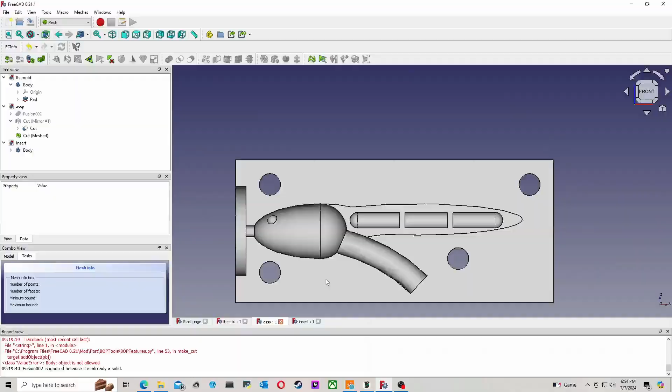To fix that issue we just had, I decided to hop back into my CAD program and fix this thin area where the tail had ripped, making it a little more sturdy so that upon future demolding I could lessen the risk of tearing it apart.

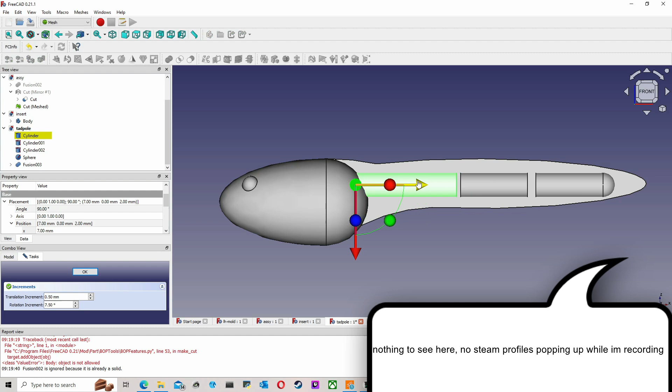The software I'm using is called FreeCAD, and you can see I'm manipulating this primitive cylinder feature to get it so that it comes up into the body of the tadpole, whereas previously it didn't go all the way, causing a thin section that would rip when I took it out. So this is a super simple, easy edit. Should not take any time at all, and then we'll be off printing a new mold.

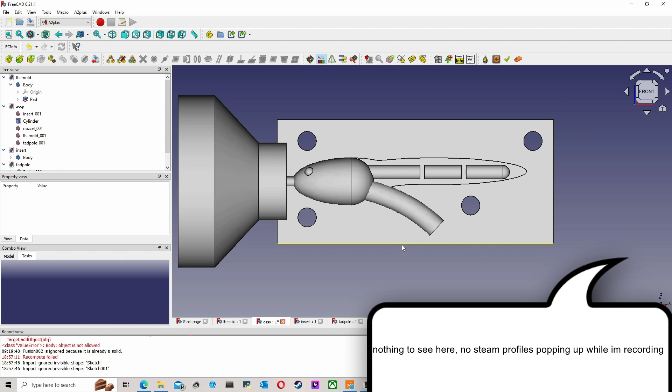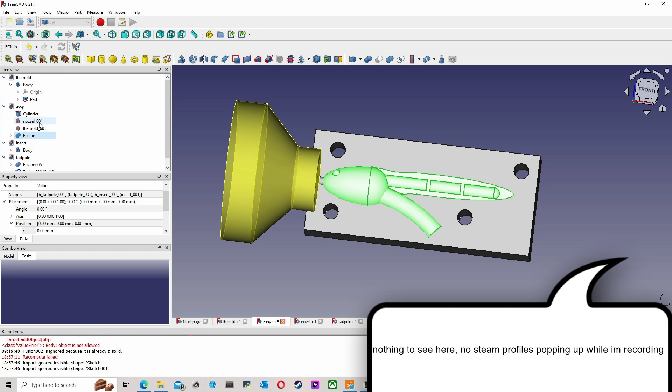Now that we got the updated CAD model, all we have to do is take that updated CAD file and load it into the assembly file so we can do our Boolean cut and actually make the mold we're going to print, making this updated part a reality. Again, this will be a super quick, easy thing to do. Shouldn't take any time at all, especially because we already had a working file that we printed and tested, right?

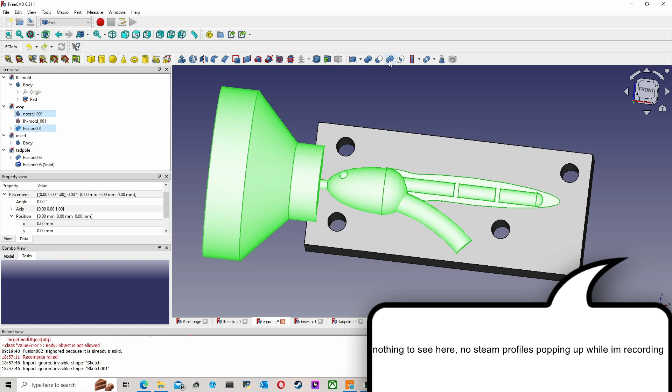So let's do our Boolean cut and get going... for some unknown reason, okay, let's try this again with a different Boolean operation, see if we can fix this really quick. Okay, it did not like that one either. It's okay, we can fix this, it's just gonna take a little bit of doing. Tried again, and it did not like that one either. Okay, this might take some doing to fix up here.

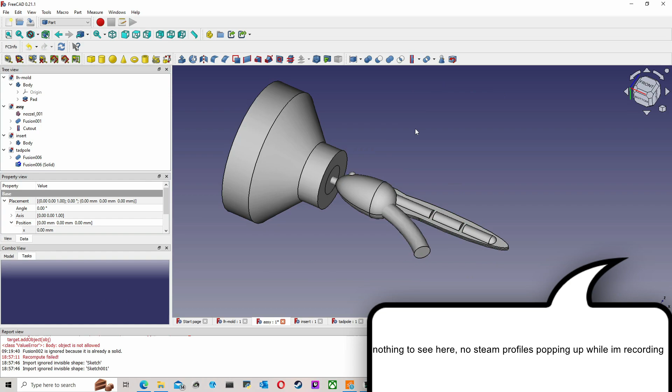So then for the next hour and 49 minutes and some odd seconds, I spent trying to troubleshoot the Boolean operation to figure out why all of a sudden this model that I had, that had worked, was now broken. And I had a wonderful time doing it. I love doing CAD. I had so much fun.

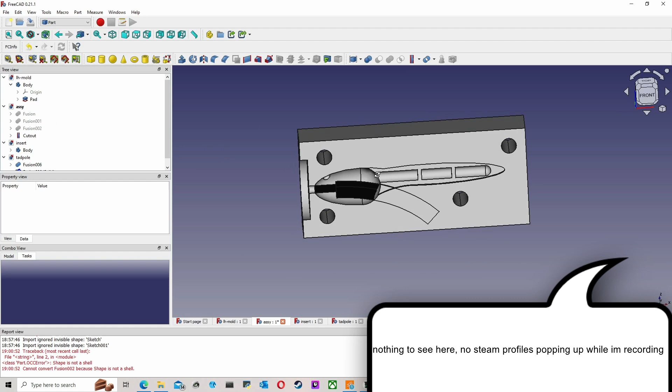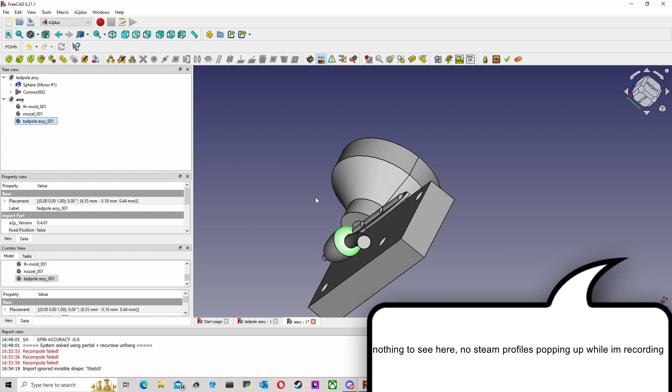So you should do that. So I went to bed, went to work the next day, came back home, jumped on the CAD software and solved the problem, which was this little sphere here, in approximately 9 minutes. I don't know exactly what with the sphere was causing the problem.

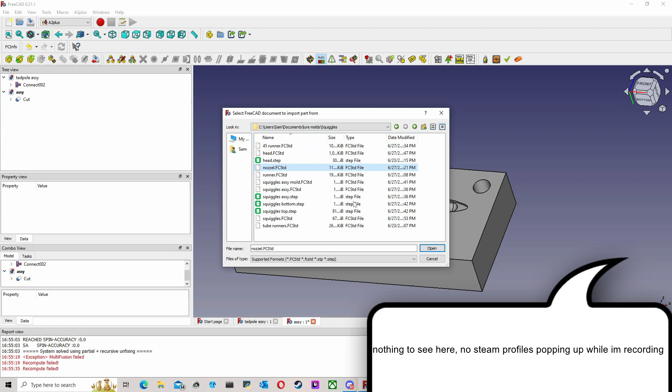I think it had something to do with the fact that I had mirrored the body in the part workbench, and for some reason it just did not like that when I tried to do the Boolean operations you're seeing now. But I removed the sphere, and then it worked. Anyway, regardless, we got through all of the difficulty with the CAD software. We got it working, and then we were good to go.

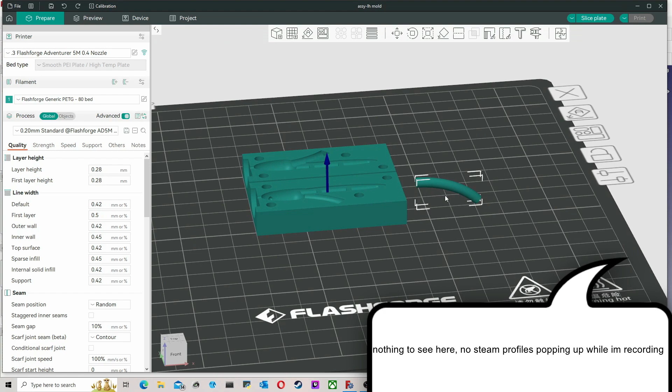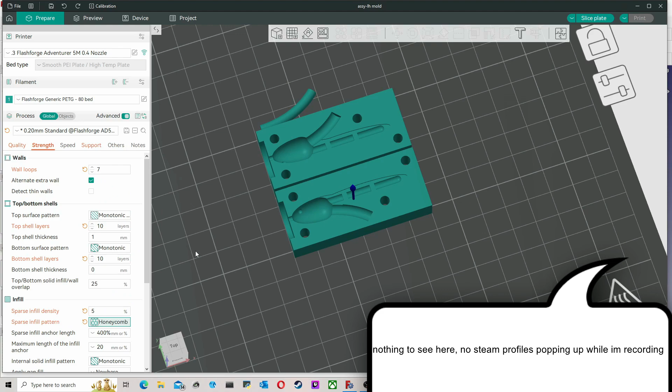So we took our Tadpole, loaded it into our slicer software, and got printing. I don't want to go too far into the actual printing settings in this video, but I'll tell you I'm using PETG filament with a 0.28 millimeter layer height, 0.28 millimeter first layer height, and you want at least a 3 millimeter thick shell the whole way around where the molten plastic's going to be. That works out to being about 7 walls with 10 top shell and bottom shell layers.

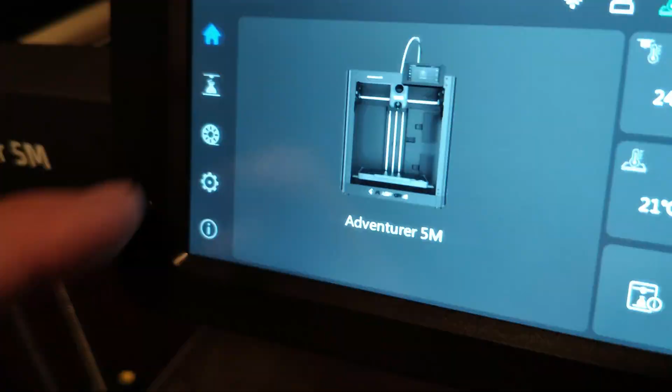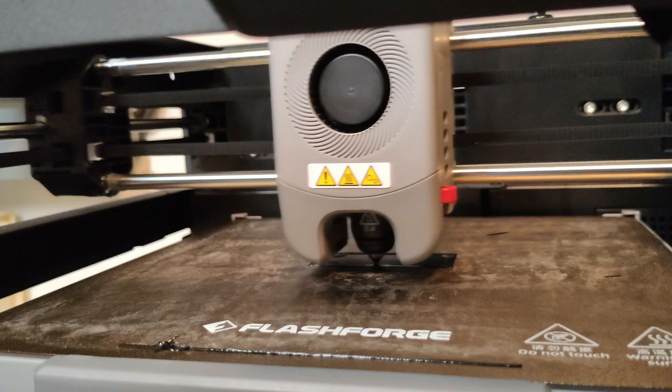So we got our models sliced up, and we're ready to print. We're going to be printing today on our FlashForge Adventurer 5M. This has been a really great machine, a Core XY printer. I would highly recommend it to anybody looking for a about $300 3D printer. Don't think you could go wrong with it.

And 49 minutes later, we've got our finished print. Similar to the beginning of the video, I did print 2 of these off so we can stack them up.

And pour this nice white color. After the first one, I just felt compelled to pour this nice white color. I just felt that this Tadpole lure would look great in this off-white color. I just don't see anything wrong with the mental images here.

And with that, let's give the mold some time to cool down and then break them apart, as I will show you right meow.

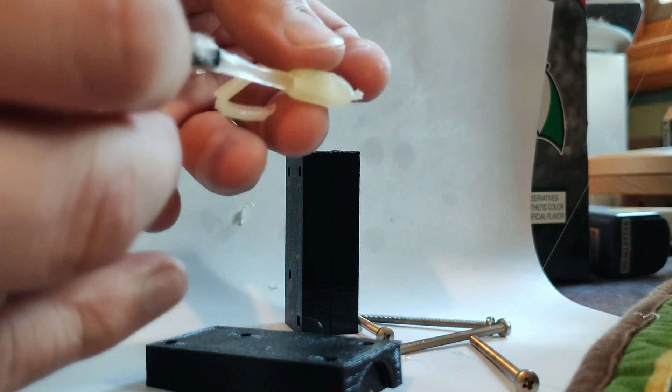Alright, our mold's cooled down, so it's time for the big reveal of our Tadpole lure. As you can see, ladies and gentlemen, that is clearly a tadpole, nothing else that could be. Looks beautiful. And as we can see here, critical moment, that insert just comes right out and does not rip off the tail. Perfect. And there it is, our perfect little Tadpole lure.

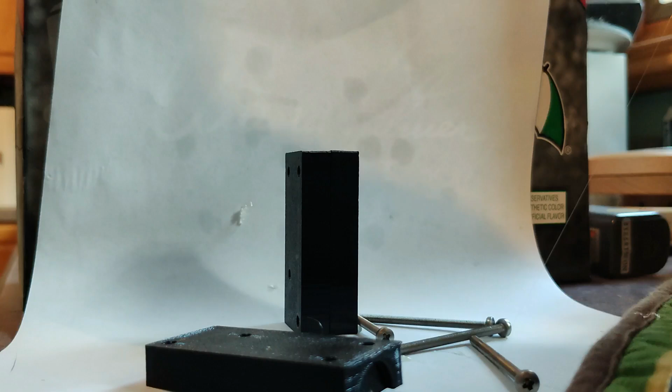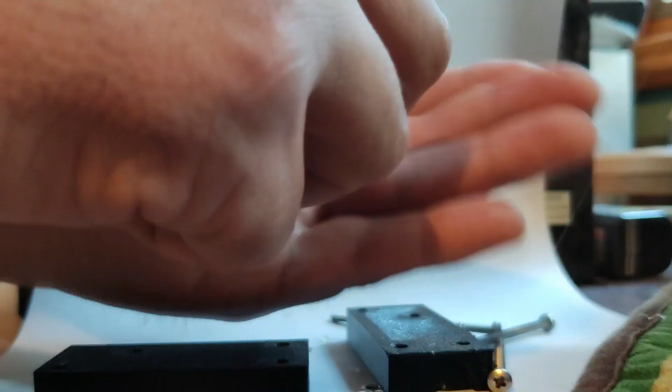And like my strange Uncle Jim, good things always come in pairs. So with that, let's open our second one. And like opening a loot box on CSGO, the suspense is killing me. Here we go, ladies and gentlemen, an oddly coffee creamer colored tadpole lure. Using my left hand because it feels different, here are my 2 tadpole lures.

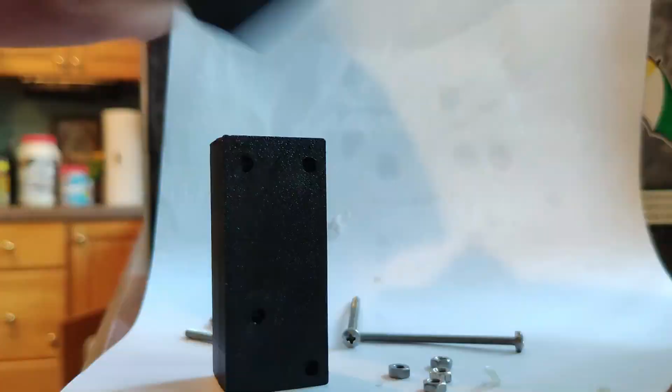And with that, we were off to the races to see how many lures we could pour before my plastic cooled down. Because when it cools down, this is what it sounds like. That is the actual audio from that video of trying to suck the plastic into the injector. Alright, I promise, no more off-color jokes.

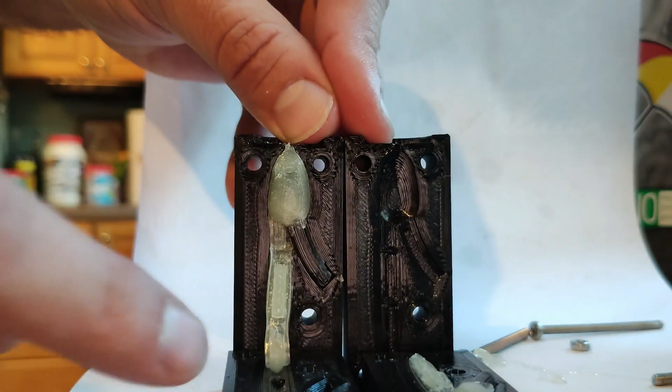My plastic was now cold, and I had the results of my work. The final reveal of the coffee creamer colored tadpole lures. Mighty fine looking, if I do say so myself.

The fruits of my labor now realized: 8 tadpole lures, 2 molds, and a pile of plastic that can only be described as resembling the contents of your mother's stomach the night you were conceived.

With about an hour of daylight left, I tied on my tadpole lure and headed down to the river. Jerking the tadpole gave this really nice tail flip action, and honestly dragging it through the water left a little bit to be desired, which told me probably a drop shot rig was going to be the ticket for this particular lure.

With that, I was off to my favorite fishing ground, and with my socks and Crocs protecting me, I trudged through what can only be described as whitewater rapids. Despite that, I made it to my favorite spot and was ready to try out my tadpole.

And it didn't take long before I was met with success. This green sunfish thought my tadpole looked great, but my earlier fears were confirmed when my lure kept catching these weeds. A drop shot rig was definitely going to be the way to go.

Wasting none of the available sunlight I had left, I quickly fashioned this drop shot rig with nothing but a toothpick and a piece of string.

By now I had mere moments of sunlight left, and that's when disaster struck. My drop shot rig failed me. So I tied on a new jig head, and in the process of that, I dropped it into goose poop and also lost the jig head.